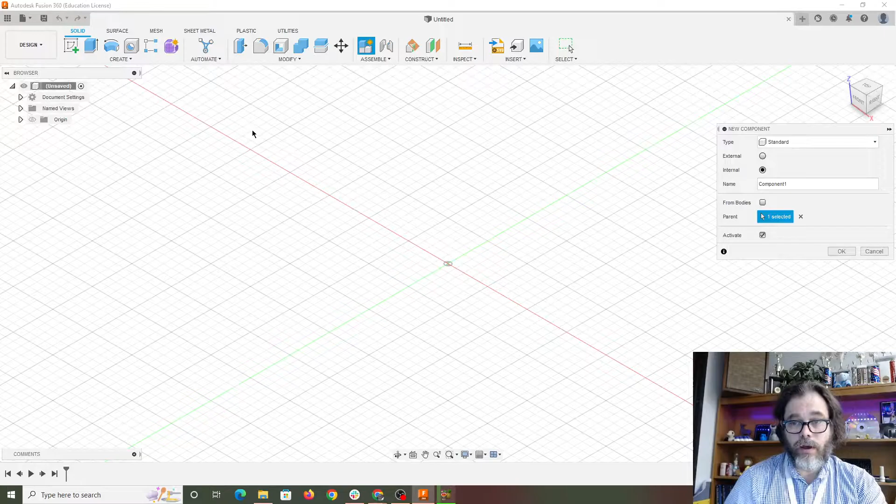So as always, we've got Fusion 360, brand new thing. We want to right click over here, make a new component. We're going to make a bowl. So let's do that, make a bowl. I've been working out of my brain right here, but ideally you should be working out of some dimensions that you have drawn up ahead of time. That way you have some idea of feel.

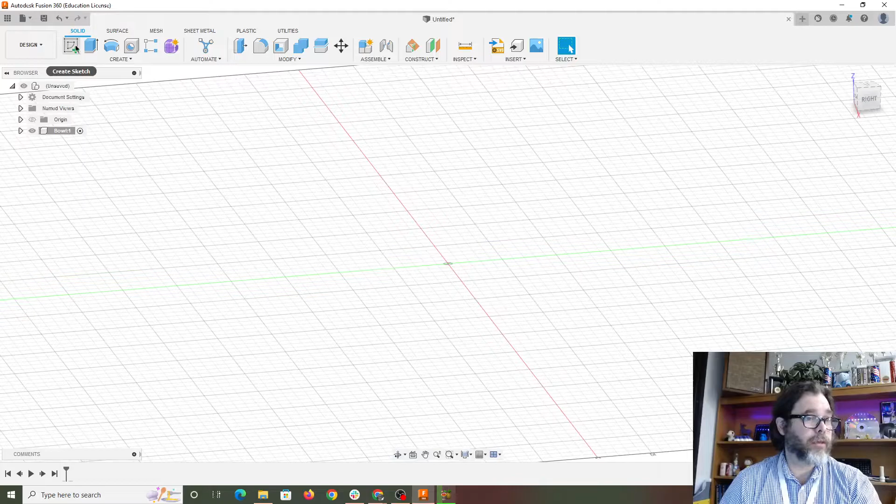Even though Fusion 360 is parametric and you can go adjust things later, it's a good idea to work from something. So as always, start with create sketch. Instead of on the XY plane as I have been doing, I'm going to start in a vertical plane. Okay. So I like sometimes when I'm doing this to define some space. So I'm going to make a box that gives me some idea of the space I'm going to work in.

If I want a bowl, remember this was a radius, so 10 centimeters seems way too big. So let's go with 80. That's going to be 16 centimeters across altogether. That's way too big. So let's go down to 40. 40, that's too small. 60, I still don't like it. Let's go 70. Again, notice I'm looking at a ruler, and so this is going to be 70 here. The whole bowl is going to be 140 millimeters across.

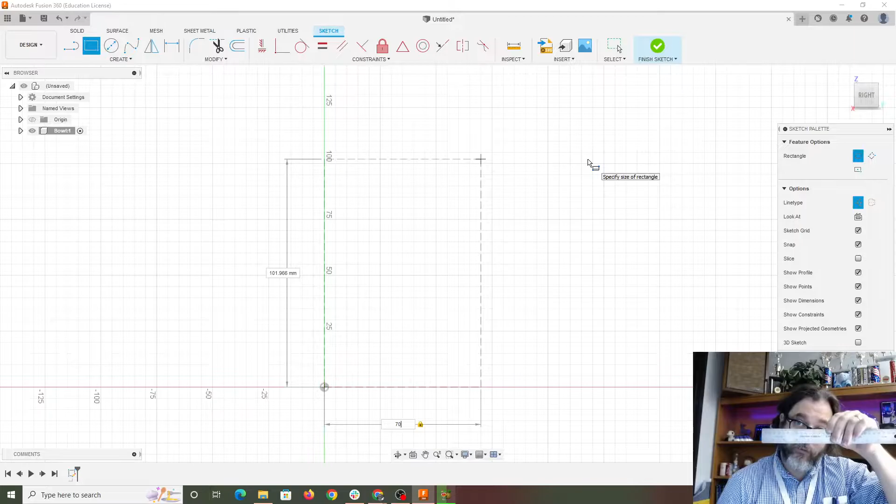How tall do I want this bowl to be? Not too tall, 50. Let's go up to 75. That makes sense. All right, so all this is giving me some dimensions to work in. Now, I'm gonna want this bowl to have a flat bottom. So I'm gonna take a line, and for about the first 30 millimeters, I'm gonna do that. Notice my line was not solid, so line tool, hit X so that it becomes a solid line, go to 30.

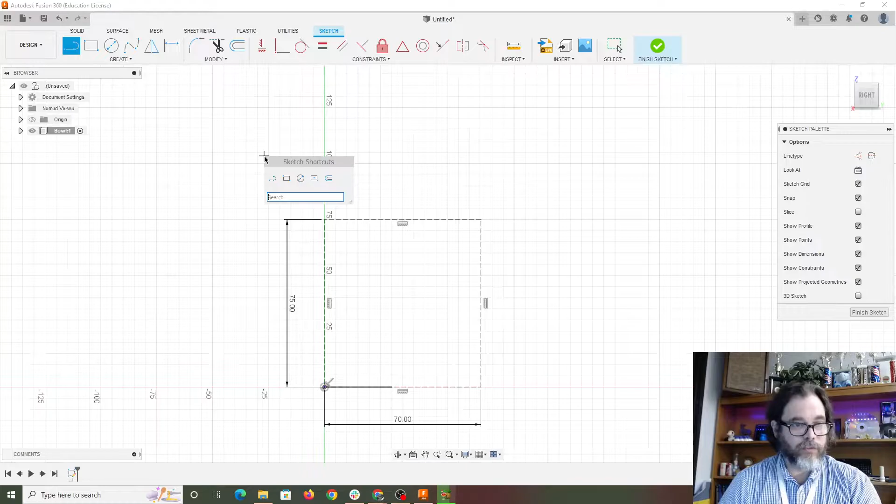Then I'm going to need to make a curved part coming up. So if I go to search, arc, there's ways to do arcs. Let's do a 3-point arc and just see what we like. So come here to here, and then I'm going to bend this until it's pleasing. That looks pleasing enough. Cool. Then this transition here, it's not very good. So good old friend fillet, and let's do a little more aggressive. That looks good. So now we have an aggressive fillet there.

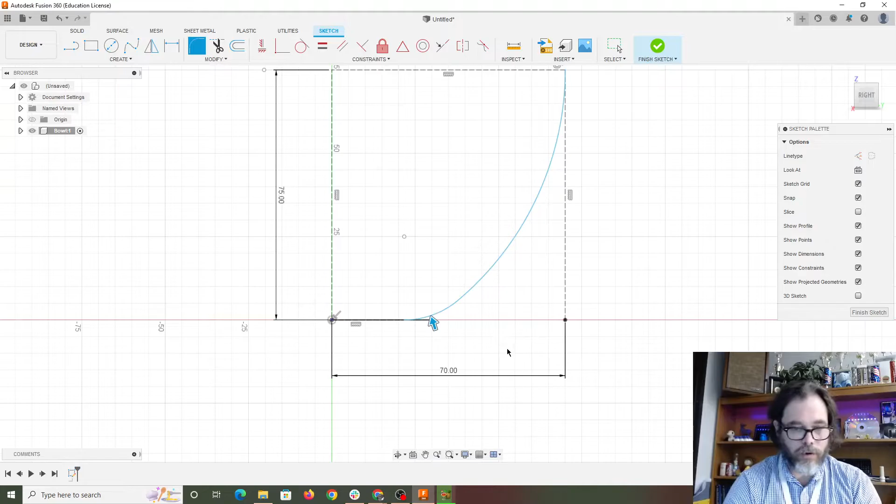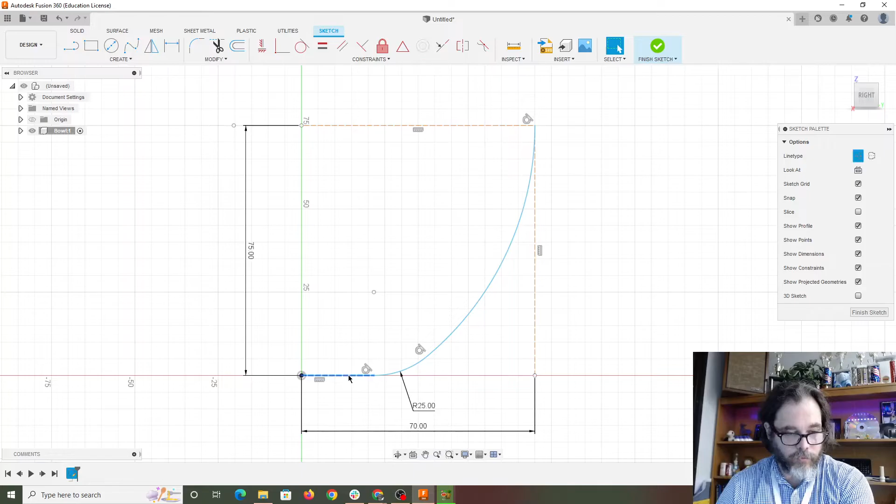So now we have a line, but we need to make this into a closed area. So I'm going to use the offset tool. This layout line is really no longer needed. Yeah, that's what I was afraid of. I'm going to go ahead and get rid of it because it was really just looking like it was in the way.

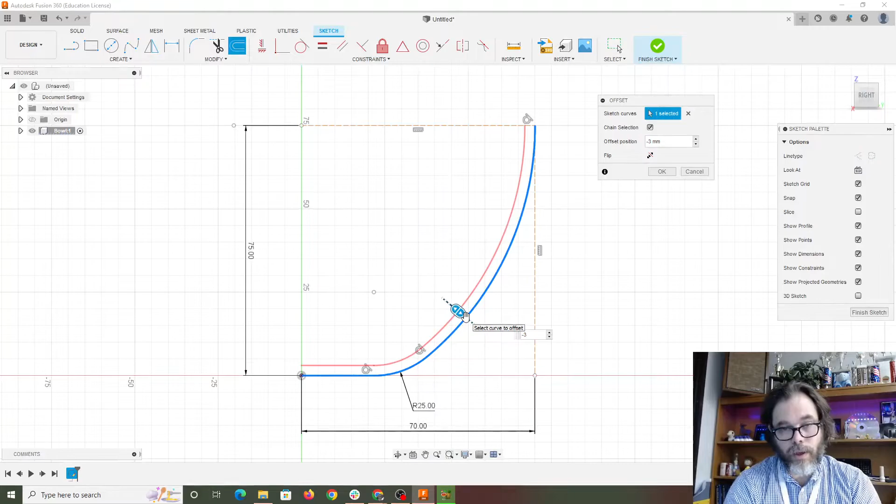So let's go to offset. I'm going to take this whole line, offset it. This does not need to be very thick, so let's say 3 millimeters. Let's go to -3 in that direction. Doesn't really matter, but let's just do -3 because it makes my brain feel better. So now I have the curve that I want for my bowl. I need to deal with the top, and I need to deal with the bottom.

So down here at the bottom, I need to close this in. A little line there, perfectly fine. Up at the top, I have found that using a circle, or at least a 2-point circle, works really good. So if I click there to there, that gives me a nice 2-point circle. And then I can come in with the trim tool, T, and trim it out. So now we've made half the bowl in profile.

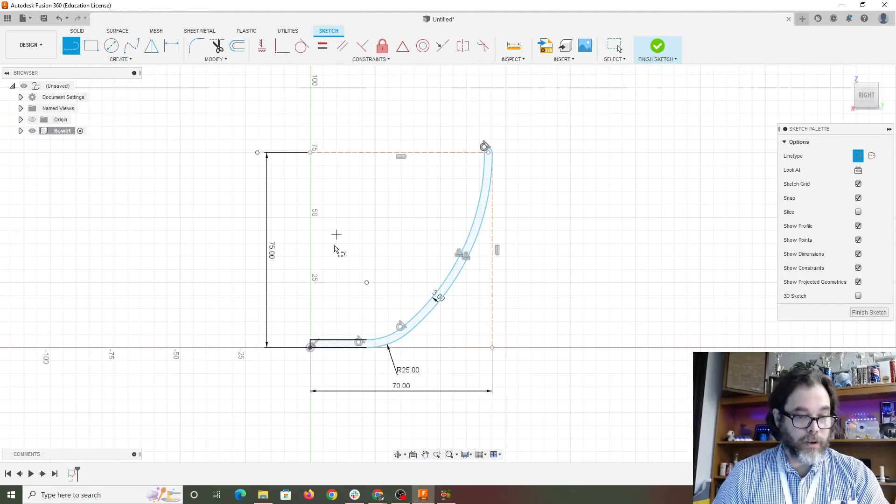The last thing I'm going to need is a line to revolve this around. So I'm going to do line again. This time I'm going to deliberately hit X. I'm going to bring up a perpendicular line, and now I have a construction line. And again, I do not need those lines. Can go ahead and trim those away. They weren't really in the way, but did it anyway.

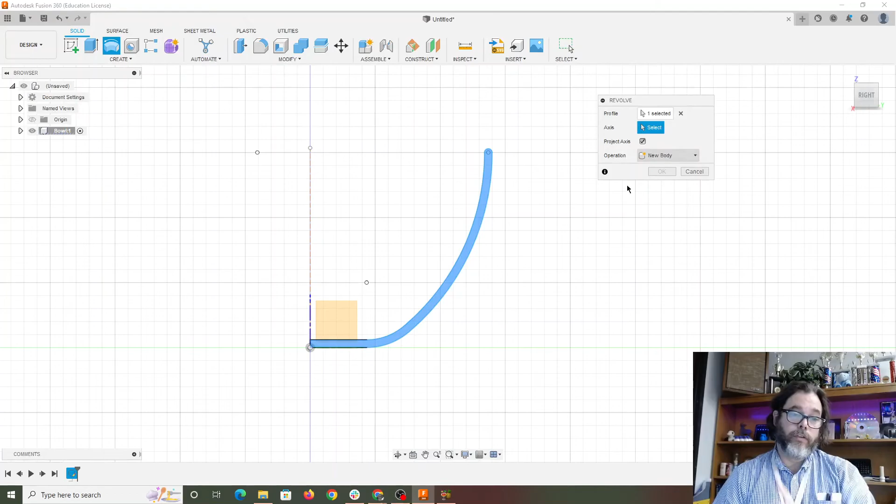Finish my sketch. Now, usually we've been using the extrude tool, but this time we're going to use the revolve tool. And notice it automatically selects this profile. It's asking us which axis we want to revolve the shape around. So I'm going to select this line that I've created, and voila, we have a bowl. Okay. In a later video, I'll show you how to emboss letters on the side, but I think that's a good stopping place for now.